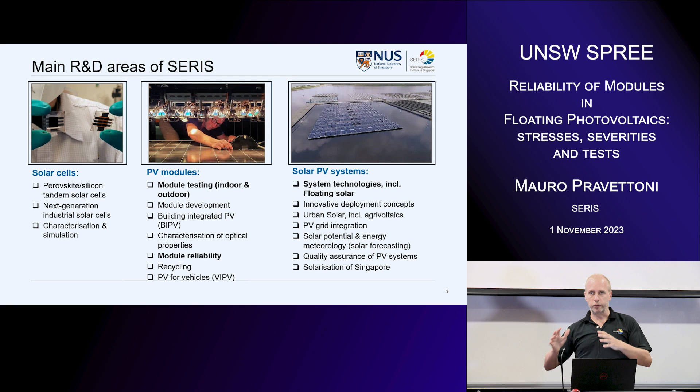So the main R&D areas of the institute cover solar cells, solar modules, and solar systems. There's a picture there showing me measuring an incident angle modifier at module level. That's one topic that we discussed this week quite intensively. The slide here lists a little bit of our topics. Let me see if I can go there with this. Yeah, there we are. I highlighted here in bold the topics covered in this presentation: module testing, module reliability, and floating, which covers both the system and the module level. But here I'm focused on the module only.

Floating PV is one of the 3 flagship projects of SERIS, together with perovskite, more specifically perovskite on silicon tandem structures, which is the flagship project of the cell cluster, and building integrated PV, which is our own flagship project, although today I'm not talking about BIPV at all. And of course floating, which has been pioneered together with other institutions worldwide, but with an important effort by my institute in the last years.

Now here I want to show a little bit about my laboratory, for those of you who have never been there. We are located in an off-campus site from NUS in Singapore, and at level 6, this is what you find there.

I try to use a color scheme. There are some climatic chambers of various sizes. As you know now, the modules are gigantic, so we need to have big chambers for them. Then we have the blue boxes that are all related to irradiance tests, so solar simulators, both for high accuracy measurement, but also for light soaking, and UV testers.

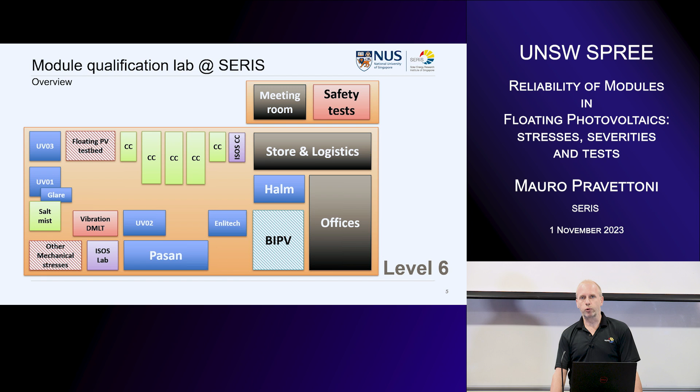But probably what is more important to highlight here is the mechanical part, including the project for a floating PV testbed, for which I will say something at the end. Now, if you go out from the laboratory and you go down to level 1, you enter and you will find very soon our recycling lab.

So basically, this is a project for which we aim at achieving circularity. Modules and cells, in fact, come into the institute, come into our laboratory. We can make modules with the BIPV group. Then we test modules with stress tests. Eventually, we may destroy modules, and we want to recycle them. So here are some pictures of the machine we are going to install early next year at level 1 in our institute.

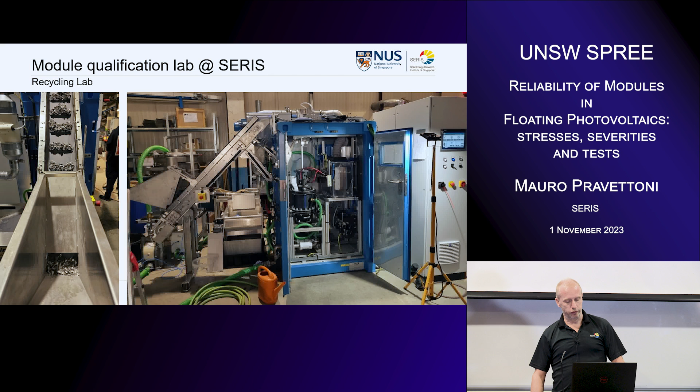On the other side, if you go on the roof, then you enter our outdoor test bed, which, as all test beds, has a light-induced degradation research area, a PID research area, which is very specific for our climate, and other reliability tests in progress.

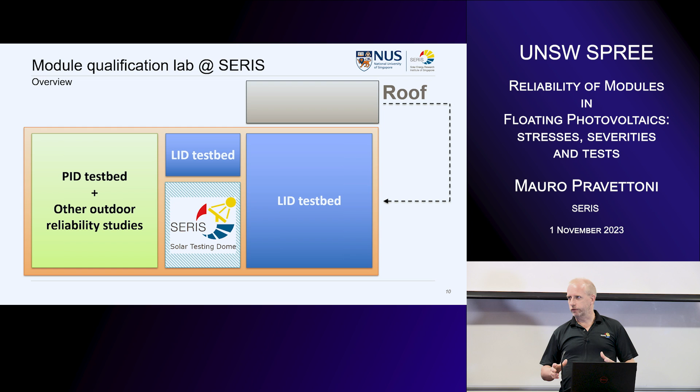Plus, what we are planning, and is mentioned there at the center as SERIS testing, what is it? Well, it may look like this one more or less. So the idea is to have at the same location a BIPV test bed with plug and play BIPV tests, and also a dome that opens when we want to measure in given conditions. That's it for introducing you to SERIS.

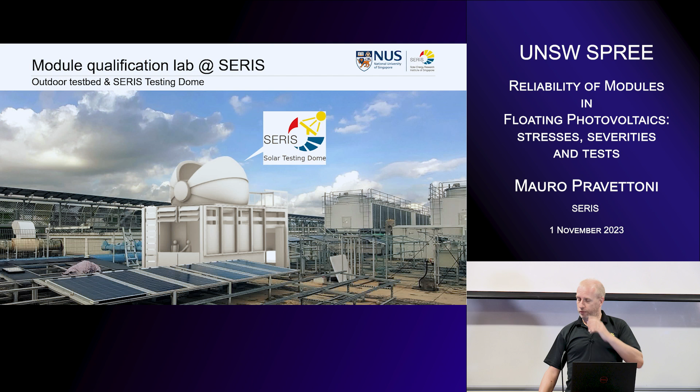And now from the next slide onwards, I will enter the topic of today, which is reliability for floating PV. So the starting point here is what I call conventional PV, which I want to differentiate from what is going to be new in non-conventional PV. Now I'm talking to scholars, students, and experts, for whom maybe this distinction is a little bit more gray now, because we all deal with new things, and new things are probably not really conventional.

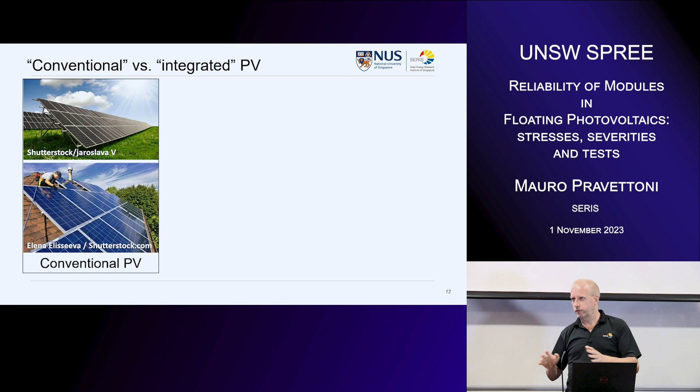But for the sake of simplicity, I really divided here what I consider conventional, which means if you put a module on the roof or in the field, well, that's well known, right? It is also new, always new, but at least it's conventional. I call it conventional. And what you put elsewhere, I call new integrated PV solutions.

In fact, my institute, together with other institutes, including Jülich, I believe, and other Chinese representatives, launched 2 years ago a new workshop. New workshops are always welcome, right? An integrated PV workshop. So here we want to group really everything that goes on cars, on floating, on urban infrastructures, on buildings, because we believe that there are even more new things to address, including specifically what I'm saying today, reliability aspects.

So here I group 3 of them, but there are several, of course, and the fantasy of our field and our manufacturers is never ending. So there will definitely be more in the future. Anyway, here we are talking about floating.

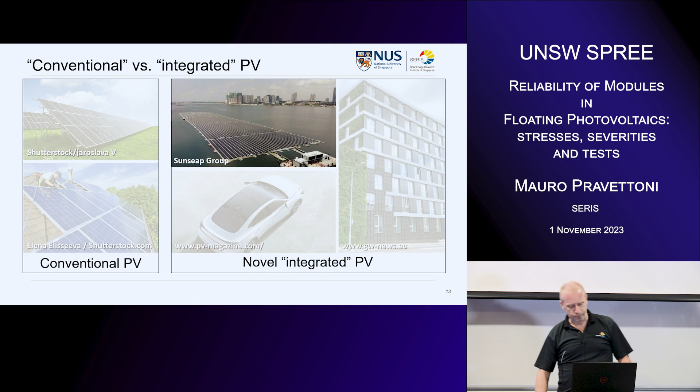Now, the market perspective in floating is clearly growing. The interest is there, and every one of us can see it. It is a little bit regional, still biased. It's not equal everywhere, right? But somehow all countries are looking with some interest at floating PV for various reasons. Here we see the floating solar installations in gigawatt DC foreseen up to 2026, to 4 gigawatt or so. This is an estimation provided by

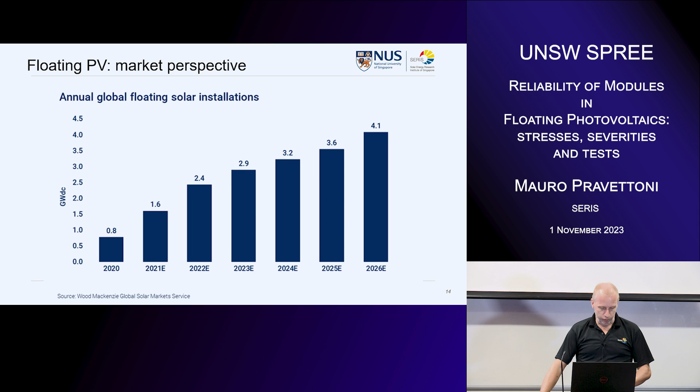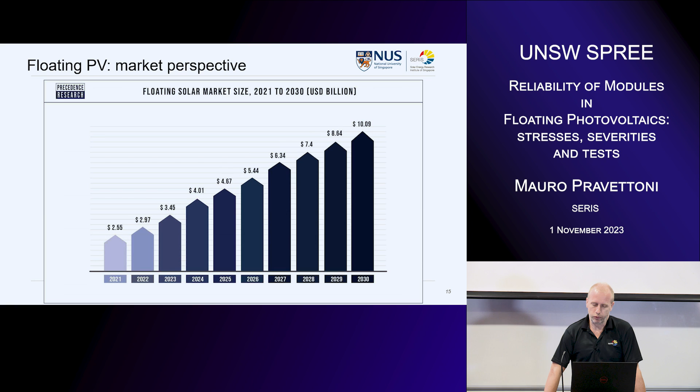Wood Mac. Another agency shows here the floating solar market size. Again, linearly growing. We don't know, but in the PV world, we often see something that starts linear and becomes exponential very soon. So it may continue linearly, it may stop, but there's also a chance that it can grow even further than these numbers.

Now, as I said, at the moment it is still very, very geographically biased. It's mostly an Asian game at the moment, as you see in the color schemes here. We are where we are now. Well, this is a little bit outdated, right? I'm not sure if this estimation has been confirmed, but I think pretty much it is. So as you see, this is in percent, of course, so relatively speaking.

China is dominating the installations and the market size, but with important competition from India and South Korea. We all know this because, apart from me, who comes from Singapore, although with a European background, these are the countries that are more active at the moment in our pre-normative activity.

See the all others, which is always an area that is growing. So there are other countries. I think it's worthy of mentioning the Netherlands for Europe, which is by far the biggest one at the moment, and yeah, other countries most likely will follow.

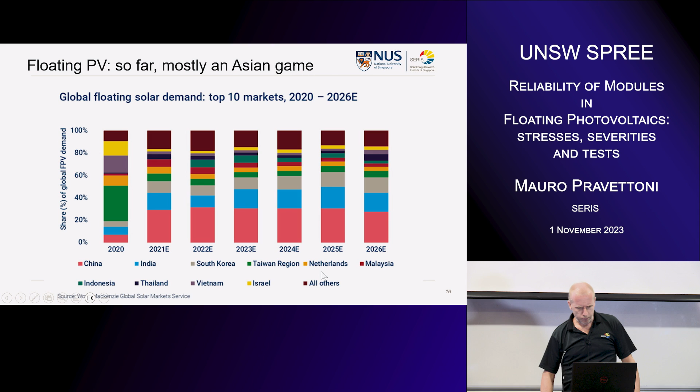So here again are the countries that will cross 500 megawatt of cumulative floating PV power installations by 2031. Again, China, India, Indonesia, South Korea, Vietnam, Thailand, and downwards towards more other European countries. Worthy of mentioning USA, if not just for something that I told many people these days,

episode, right? So I started presenting some ideas that came out in this presentation today back in last February at the annual reliability workshop. And to my surprise, I think it was talking with George, but anyway, to my surprise, there was little on floating. And coming from Singapore, where everybody talks about floating, I was a little bit surprised.

So I asked some colleagues from NREL why, and they said, Mauro, we have plenty of land, right? Why should we put solar on floaters? Same argument may apply here. So most Australian friends here may have the same perspective. Why should we put on floating? We have plenty of availability of land. And then I was a little bit touched, saying, I'm stupid. Of course, that's true, right? I mean, Singapore has a problem with land, we'll see next slide, but definitely not all countries have this problem.

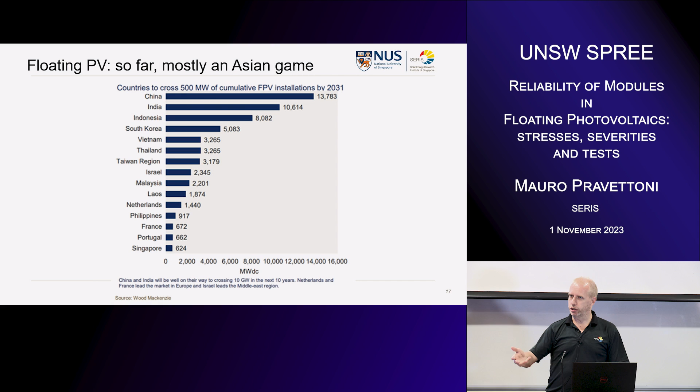So then on a following night when we were having a beer all together, I was thinking, but come on, China? China's not small, right? There's plenty of land there too, so why are the Chinese pushing so much on floating? And then I asked a Chinese colleague, and he told me, you know what? There is this nexus between floating and fish farming that the government is very interested in, also to push a little bit the economy of fishermen, right? If I say it like that. But anyway, there's this nexus which is of a lot of interest. So it means that it can be of interest also in other countries that follow the same reasons.

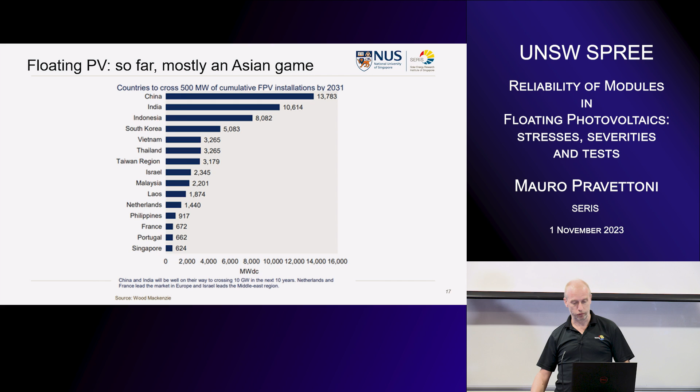And the population is I think the third or the fourth in the world in terms of density, and that's probably the driving reason, right? So we are highly densely populated, and we need energy, and we don't know where to put solar energy. I mean, we have somehow depleted all the possible options, and floating is the next one. But of course, floating comes with troubles, right?

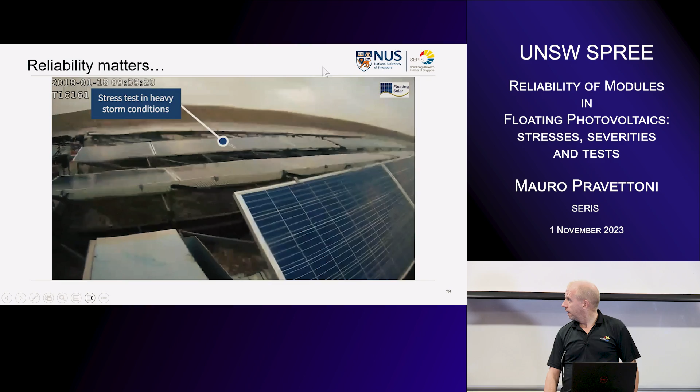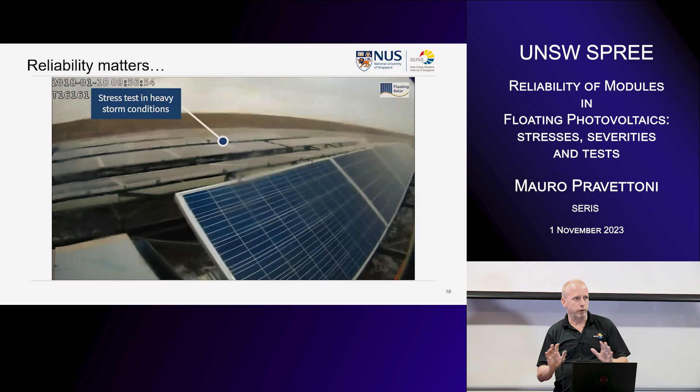So the topic of my presentation is somehow shown here. Out of the impact of images, well, you don't necessarily have to put solar modules everywhere, right? You may avoid certain areas, but we know, back to the idea of conventional versus non-conventional PV, you can't have steady water, right? There will be waves. There will be some movement, which for us reliability experts in the room means there will be troubles there.

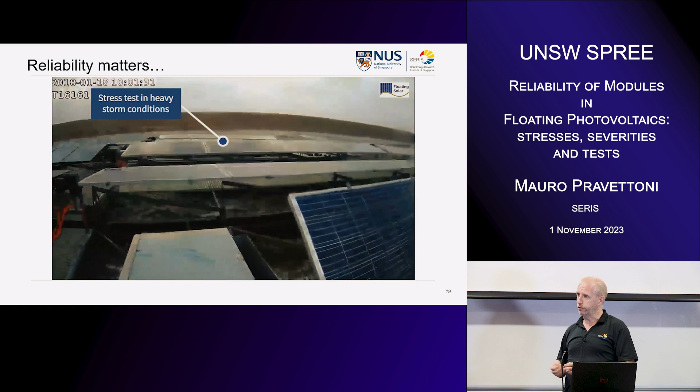Anyway, there is something we need to assess further. Not only that, another problem is of course safety, and here there's a nice journal press release by Emiliano, and it shows something that happened this year, right? So basically, a floating plant somehow landed in Hong Kong, and there are many problems, including that nobody knows where this comes from.

So someone should pay for the damage caused, right? It's funny somehow for those who are not the owners of the plant, of course, or the island, but we have to address something and be sure that these problems do not become more serious than they are.

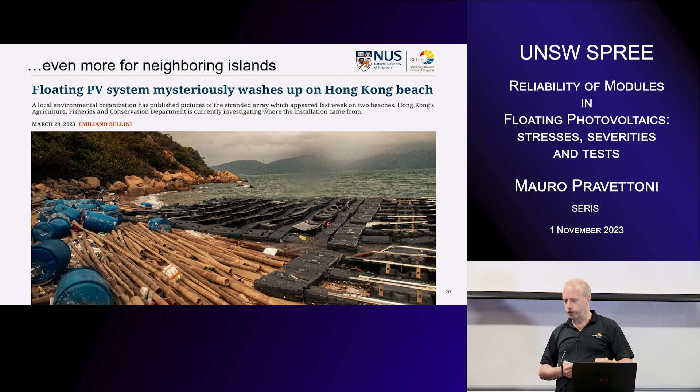So I mentioned previously already that the story of SERIS with floating is not new. We started already some 5 plus years ago, right? Even more than that, let's say almost 10 years ago now, proposing floating PV as a solution for Singapore, and started liaising with stakeholders in the region and beyond the Southeast Asia region.

And the biggest highlight of this research activity has been these 2 publications with the World Bank, which you can download from our website. You just Google this, where sun meets the water, and you can download this for free. The findings described here later came into a national standard technical report, actually, that is now supposed to be promoted as an international technical report at the system level to describe lessons learned and best practices, these kind of things.

Okay, here I just reviewed the most recent activity from 2021 to 2023, specifically the research collaboration we are having with a Norwegian firm called Fred Olsen Renewables, who are part of the people that I need to acknowledge for this work. Starting in 2021 with technology mapping and financial modeling, ending this year, still ongoing in fact, with a collaboration with DNV towards studying the problems at the module level. So again, the reliability, which is what I'm discussing today.

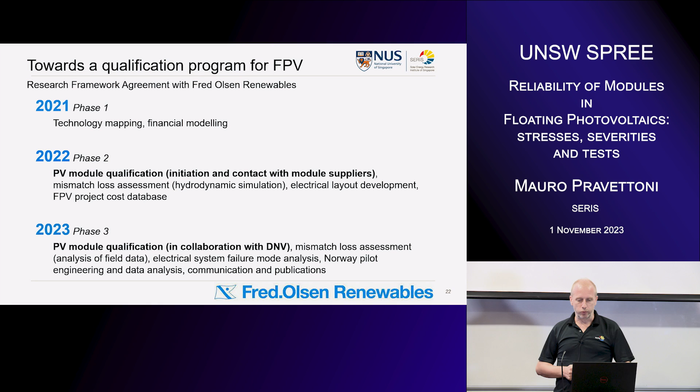As a result of this collaboration, we have identified slightly more than 100 possible new causes of failure, and we have compiled this risk matrix. So you see on the horizontal scale there is the probability class, so how likely something can happen in the lifetime. We rate from 1 to 3: 1 when it's unlikely and 3 when it's very likely. And on the vertical scale there's a severity class: 1 when we consider the severity minor, and 3 when we think the severity is high, meaning that you need to replace the module or components.

Of course, once you multiply the 2 in a matrix, you have something that goes from 1 to 9. 1 you may accept. 9 you definitely need to do something to prevent it, or take into account that this will more likely happen. Now I give you examples of failures that enter here. There will be raising hands here from my colleague from WG2, I believe. But anyway, I take the risk.

What we consider mild in the particular environment of floating is the soiling due to snow and formation of ice. Mild because maybe you don't want to put modules at all in these very high latitude regions, or because this may not be more problematic than what already happens on the roof. That's why it's considered in the green area of this risk matrix.

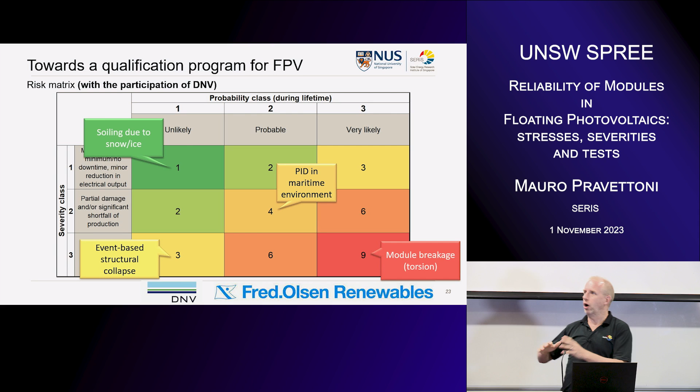We judge this as kind of probable and partial damage, depending on how severe the PID effect would be. So in order to better understand what I'm going to classify as new environmental conditions and possible stresses, here we have classified floating systems based on two bigger distinctions.

One is: is the module going to be in contact with water, yes or no? On the left, you have the case where the module is physically separated from water. On the right, the modules that are not physically separated from water. Now in the two cases, we divide again in two. The physical separation can be because the module is far from the water, still in a floating environment, but too far to be touched by water in any condition, or because there's a medium that acts as a physical separation, so water cannot touch the module.

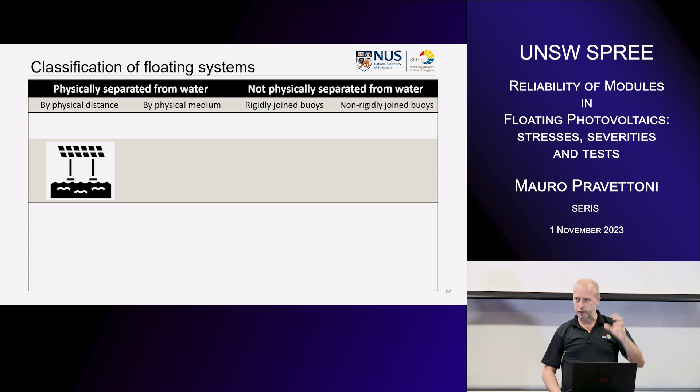And when there is a chance of contact with water, we differentiate which kind of floating system we're talking about: if it's a rigid floating system, so the module can move with the system but cannot move between each other, or when the buoys are non-rigidly joined, so the module can move with more freedom. This is an example in the sketch of physical separation -- this is a membrane, this is a unique block of floater that moves the whole system up and down, and this is a case where there is no rigid buoy.

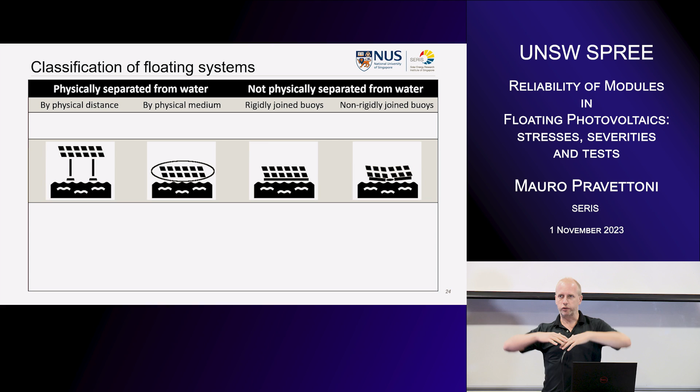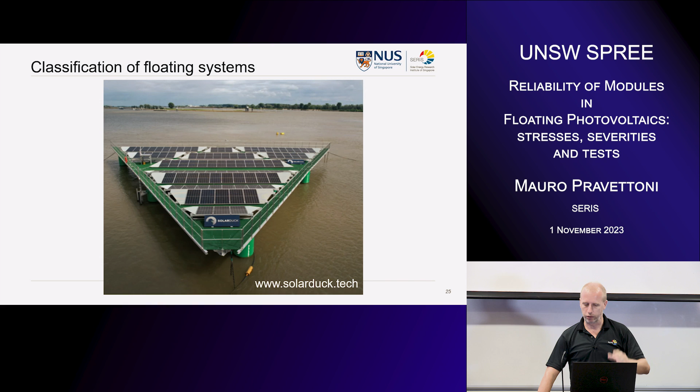This is just my own drawing, so let's see some real pictures. SolarDuck proposes this big system, which is floating, and I guess none of you doubt that it can rain, but a splash of a wave in this particular case is very unlikely, if possible at all. Now, Insane Energy -- that's always my way of pronouncing this Norwegian manufacturer, which is actually In Sea Energy -- this is the example of a membrane.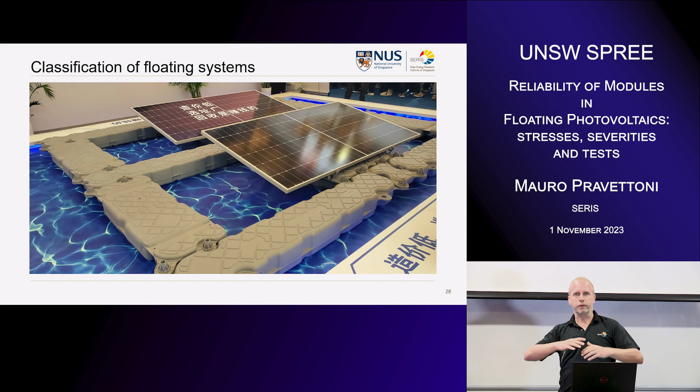And you can see why I think here there's more possible movement of modules. The difference between these systems is a difference in complexity, and that brings a difference in risk. We believe that low complexity goes towards high complexity from an engineering perspective, while the risk goes in the opposite direction. The question for the developer or owner is what they want: spend more and have less risk, or spend less and have more risk.

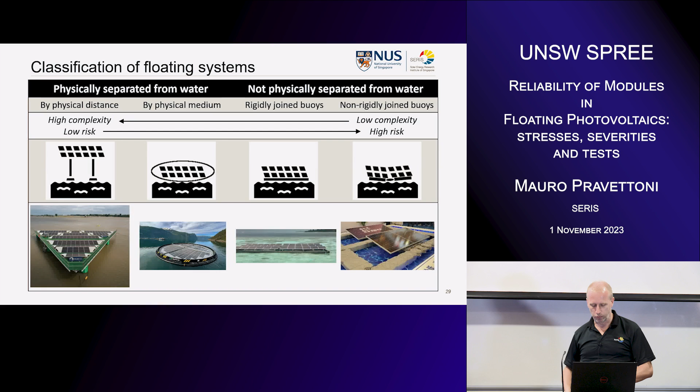So now we enter the topic, having this in mind -- we move closer to the topic of module reliability. The way we approached this was to look at the standards, what is there. I mean, step a little bit out of what we're used to doing at the module level, and look at what is outside the module level.

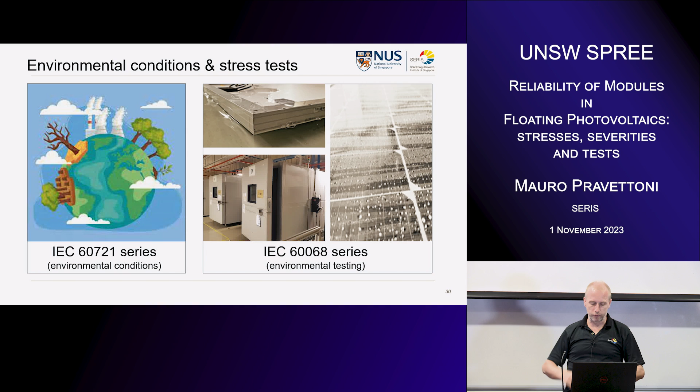Fortunately, there are two series of standards already: 60721, which lists the environmental conditions, and 60068, which lists the environmental testing. These two series of standards are correlated -- certain tests apply to certain environments. What we're used to, and probably most obvious for my talk, is the 61215 series of standards, which is module qualification. In a very simplistic form, a module that is commercialized and certified by certification bodies has to pass this test as a bare minimum, plus something else. This test tells you that if the module is put in its environment, if it passes this test, we are quite sure it will survive day one.

It doesn't say it will survive 25 years. It says that it doesn't die the day after. Then there are other tests that can give you more confidence that the module will last for longer.

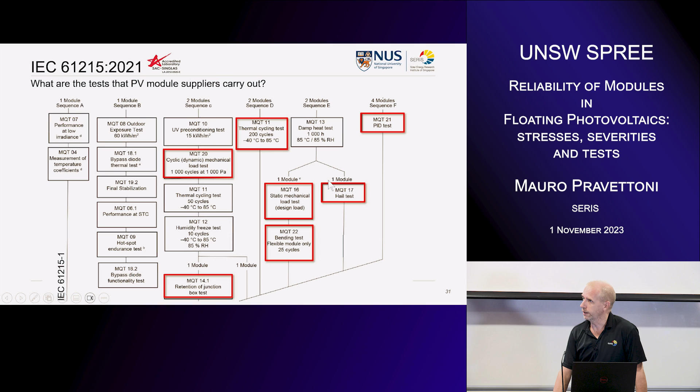Here I highlighted specifically certain tests that I think should be revisited. I'm not saying that modules that go to the sea don't have to pass these tests, but other than this, they should do something else, because the environment is different than the environment for which this scheme has been designed. And if you see, there are mostly mechanical tests that we think have argument to say that it's probably too mild for the situation, the environmental conditions in floating.

Now, moving to the new environment, here basically in this set of tables, which I will not describe all in detail because it will take too long, but at least we show a little bit. So we are listing the environmental conditions as they are classified in the 60721 standard, and the description of the possible severities that you find in maritime environment, taking specifically that environment, and possible tests that we may want to introduce. Some of these are already there, some are not.

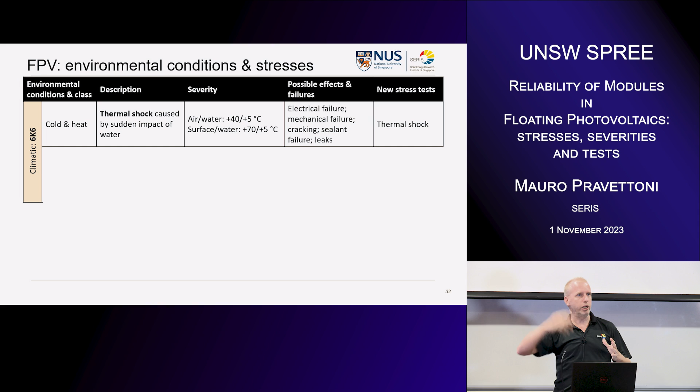Here I'll stop for a few seconds on the first one, they call it climatic environment. So that means anything that depends on the climate and deals with the variation of temperature, and on heat. A new stress test that I highlight here is the thermal shock. During our meetings this week, there's been some discussion about what that means, is it different from thermal cycling, which is a standard test we are already doing.

Here I'm thinking about the thermal shock on your module, which is under the sun, in the middle of the sea or of the lake, at noon, for which the module is probably at 60 degrees or so, and then some wave comes through, splashes your module, and the water is not at 60 degrees. The water is not even at ambient temperature. It's clearly probably at 4, I mean, it depends on the season.

And on the location, but it can be 4 degrees. In the most extreme severity that I found, the possible variation air to water, as you see there, is 40 degrees to 5. This is considered an extreme variation: air at 40 degrees and water at 5. But of course, the surface is hotter than 40 degrees, so the surface of the module may be 70, and here it's on us to decide whether 70 is representative, or you may have higher, because the module may have other reasons to be hotter than this, but whatever. And 5, again, is the temperature of water. So here the temperature of the module will move very rapidly from 70 degrees to 5. Are we stressing the modules this way? Well, the answer is clearly no. So we should consider whether it's possible to implement a new test to stress the module this way.

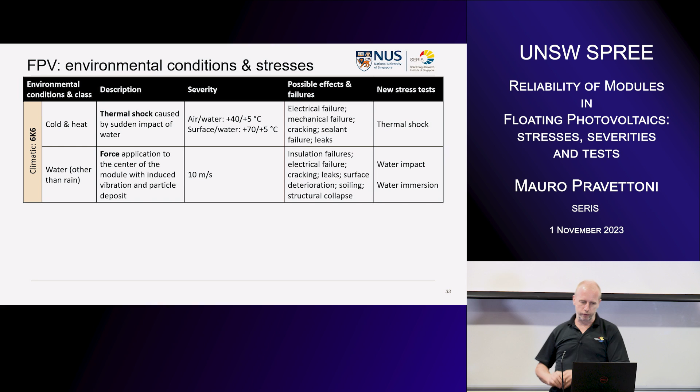Now, for the other stress tests and climatic conditions, we'll go a little bit faster in the interest of time, but trying to mention them. So, the impact of water other than rain. Modules are supposed to withstand rain, not only rain, hail, snow, this kind of environment, but on top of that, here we're talking about waves that can splash on the bottom or on the top of the module. And this is something that the normal module is not supposed to withstand. Here the severity is considered 10 meters per second in terms of speed of water.

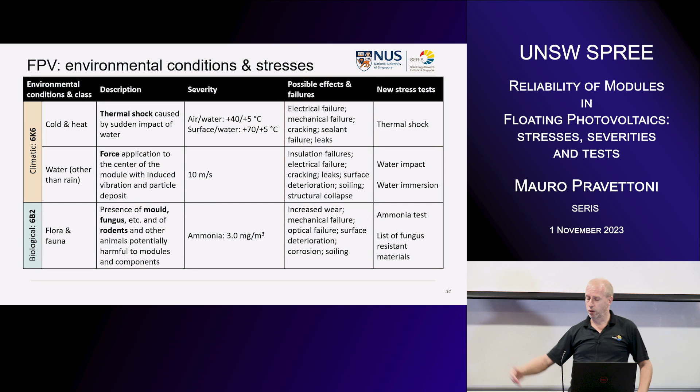Now we enter another classification, which is that of biological environment. So, some stress caused by, for example, mold or fungus or rodents or these kinds of things. We already have the ammonia test, which is not a qualification test. So a module to be put on the market doesn't necessarily have to pass the ammonia test, although it's already somehow a popular test to be done. It may become, let's say, a requirement if we go forward with qualification requirements for modules that go on the sea. And something else that, of course, at the material level, we are already trying to find. Here I put some symbol on what we think is critical.

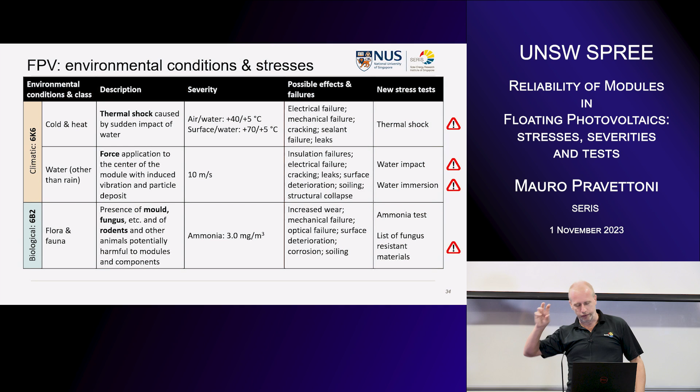Moving forward to other environmental conditions, not necessarily climatic: chemical substances, similar to biological substances, but talking about chemical reactions and corrosion. The salt, if we're floating in the maritime environment, in the sea, is definitely a concern. And whether we want to consider a combination of PID with a salt mist environment is something to be discussed.

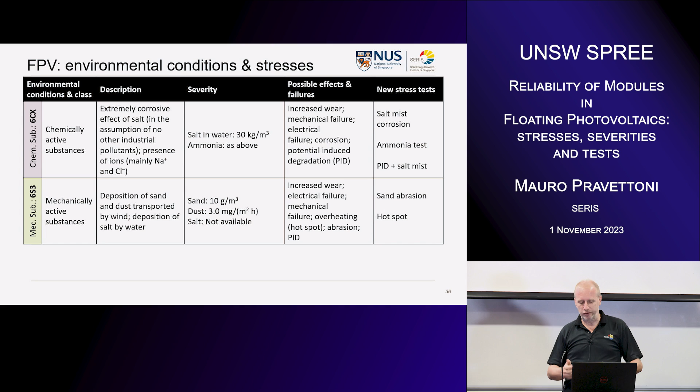Other than chemically active substances, there are mechanically active substances. So sand or salt itself can act mechanically on the surface of the material. Also, this morning in our IEC meeting, there was discussion about how the effect of abrasion can affect the quality of the module. So this may also be considered at the material or module level to be introduced.

And finally, the mechanical stresses. Here I listed 3 different lines. One is the stress due to stationary vibration. What I had in mind is the motion, mostly the motion due to the sea, the waves, or the waves in lakes. Other kinds of vibration can be caused by shock of water, and then the module starts vibrating.

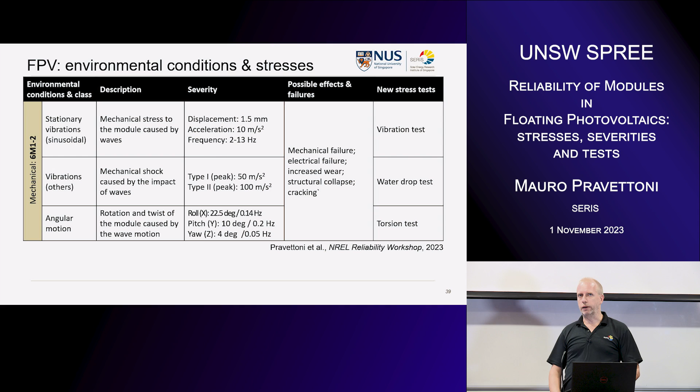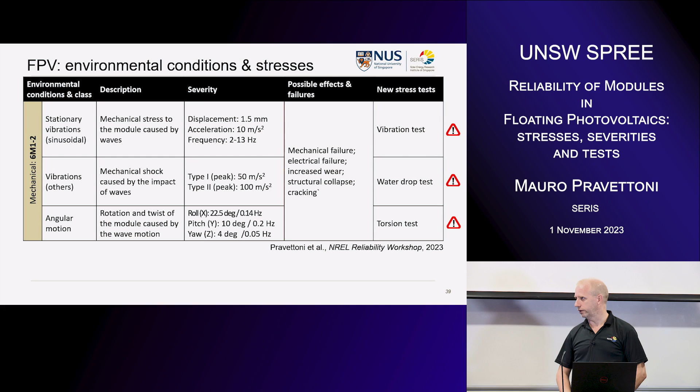Finally, the angular motion, which we distinguish from vibration. We need to understand better what the 60721 standard means. Most likely it's really the movement which in English is roll, pitch and yaw - all the movement of the boat, which now becomes a movement of the module that you need to take into consideration, because it can cause torsion, which is critical. All of these, I think, are critical, as you will see in this last part of my presentation that I'm entering now.

Here I'm showing some results, examples from a set of tests that we have performed in the last 6 months or so at SERIS. I want to distinguish 2 big tests: one is PID with salt mist, and one that justifies what I said previously, that certain modules that suffer mild PID in standard condition see an accelerating effect if you do PID in salt mist conditions.

I'm mentioning here some names where I know, but you will not see which module did what - this is for confidentiality. So we normally don't disclose that this module failed, this module passed. It's not fair. But just to show that we don't take unknown modules that you have never heard of.

These are commercial modules. Just one clarification: the modules doing salt mist were small for one reason - at that time we did this test, our salt mist chamber was still an old one, could not fit the big modules. Now we have a bigger one, and we can repeat these tests on large scale modules like the one we have used to do mechanical stress tests.

I want to highlight one thing. For PID, one very old module, PID was unknown at the time, so there's no indication in the old technical data sheet whether this module is PID free according to the manufacturer. Then we have one module by Trina that is clearly stated anti-PID, and another module which is considered PID resistant. Of course this is different wording - it may have different meaning, or may just be synonyms depending on how the commercial body of these manufacturers wants to treat the PID free quality of their module.

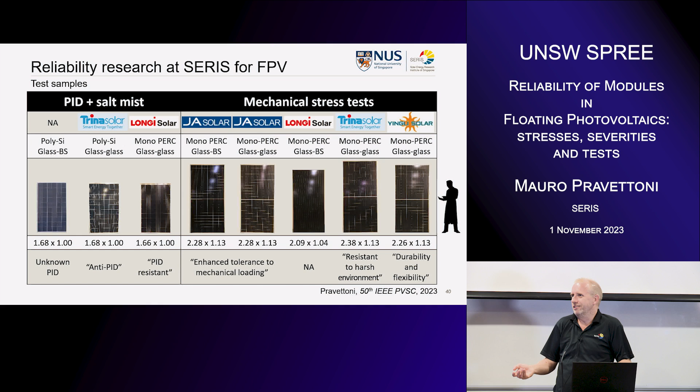And none of these have this classification. We need to be fair with these manufacturers because some of these you will see fail. I will not say which of them failed torsion, but whichever it was, they would surely say, Mauro, I didn't say that this module is resistant to torsion. Do you want a resistant to torsion module? I will make one for you.

Okay, anyway, start with PID in salt mist. This is the one which now I call PID prone, but at that time it wasn't revealed; PID was unknown. It's a very old module. And incidentally, this module suffered PID. So on this particular module, which was known to suffer PID, you see the difference between the module that suffered PID in standard environments, a standard PID test.

To be honest, this is not exactly a standard PID test. This is the old standard, 60 degrees Celsius instead of 85. And it lost nearly 5% in standard conditions; with salt mist it lost nearly double. The control module is the same module technology, and did not enter the chamber, right?

And here you see what happens due to PID. This is a module that suffered PID, and this is a module that suffered more severe PID in salt mist conditions. Now, this is the PID-free module. It is indeed PID-free.

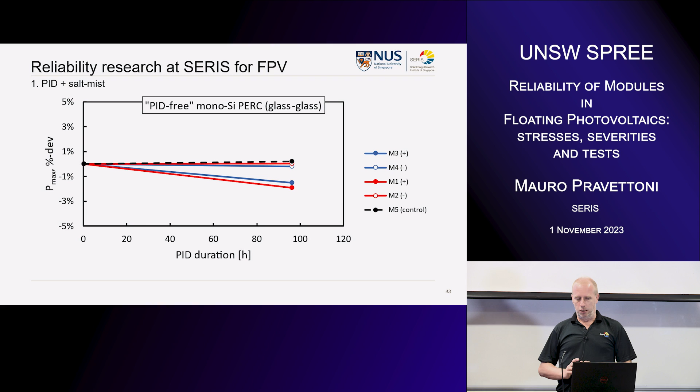We can only highlight that in one case, negative polarity, there was slightly higher degradation. But to be honest, at this level, we can't really distinguish. It may be the reproducibility of the measurement. And here, we can say there's a little bit more evidence of PID, but again, not much difference between PID in salt mist and PID in normal environment. Remember, this module is considered PID resistant. So, in fact, it is PID resistant.

Those of us that are in the reliability and standardization committee know that normally 5% is the threshold, right? So if it fails, it means that it loses more than 5%. But clearly, if it loses 1%, you're not happy. But in principle, it's a pass. And here you see the two examples of the two cases which lost more, and the evidence of mild PID occurring in these grayer cells, right?

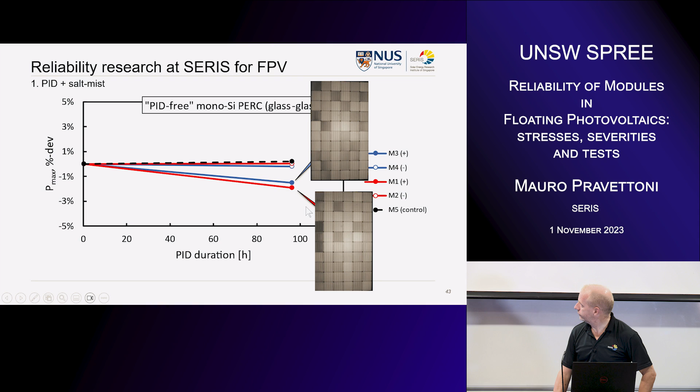Now, moving to the last of the set of measurements we have done, the one on mechanical stresses. Our benchmark was the dynamic mechanical load, because this is already a standard test. So the approach of the team was, okay, let us see if the module passes dynamic mechanical load, does it pass torsion or vibration? So basically, we are comparing these three tests.

Standard dynamic mechanical load, here you see the specs for those of you who are not familiar: 1,000 cycles, plus or minus 1,000 Pascal, and the pressure is exerted at the center of the module, more or less for all manufacturers. So clamped in a way the manufacturer specifies, at the corners typically, and pressed at the center, right? And typically to see if it passes or fails, you do pre and post Pmax and EL to see if there are cracks.

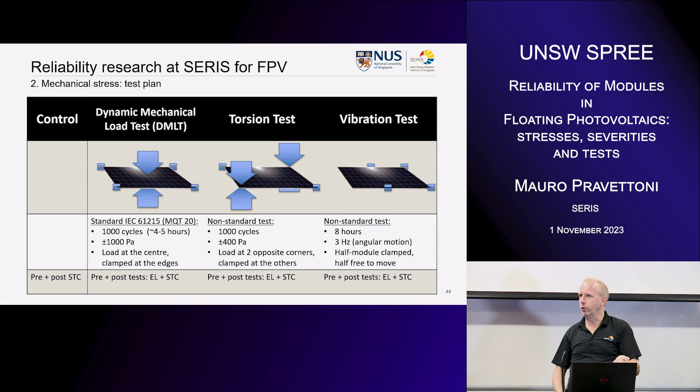The torsion we did the same, just changing the position of the pistons. You will see a movie shortly to see what I mean. So basically, we took up all the pistons, clamped the module at the corners, and started pushing up and down at the other corners to generate torsion with the system we have, without buying new equipment. And I believe this is very easy for those who have a mechanical load test bed. Everybody can do it, right? And then the question is how severe the stress. So we just used the same parameters of the dynamic mechanical load, just changing to torsion.

Sorry for my animation. I'm sure that describes perfectly what I'm doing. You will see in a movie anyway.

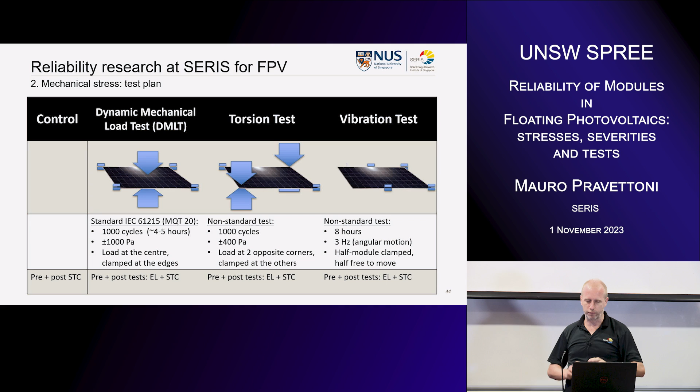So here we are clamping half of the module and letting the other half vibrate with the vibration table, as you will see. Difficult to replicate the same as the DMLT. So here we decided to keep more or less a similar duration, so 8 hours. And for the frequency, we looked at the previous table where 3 Hz was somehow the frequency of motion of waves and whatever. So we kept 3 Hz.

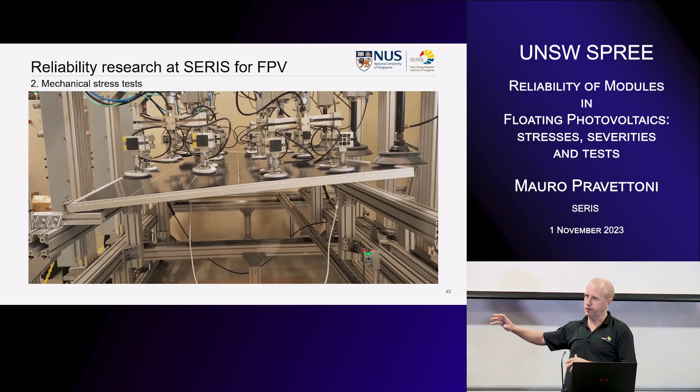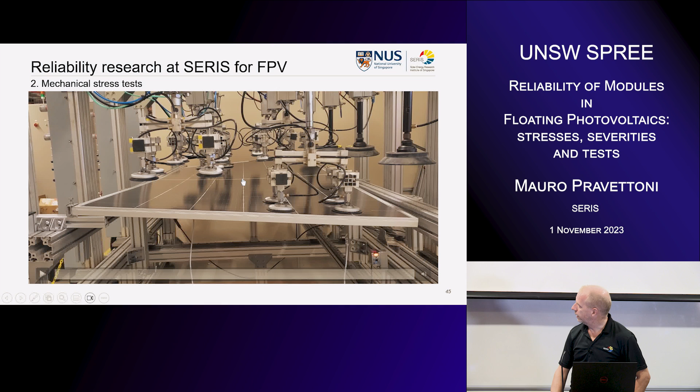Yeah. So here you see the experiment in torsion mode. Crick crick crick, maybe the frame, but usually it is not. But anyway, that's what happened. And as I told you, basically this piston and the opposite piston are going up and down. The other pistons are all released, and they don't exert any pressure.

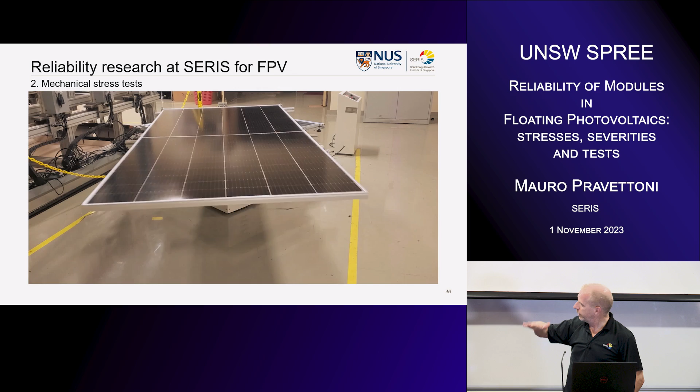And this is the vibration. So clamped at the center, we decided in this case to do mixed vibration. So not only longitudinal or lateral, it's mixed. Okay, on the vibration, actually I didn't specify previously on the table with the products: we deliberately took modules with frames.

But we also tested this one at the beginning just to see where we are, right? Test to fail, somehow. Let's see what happens. And stress it as much as we can to see when you see something, because otherwise there would be no result to show, right? So at the beginning we took what we thought were the most fragile conditions, so frameless. And with frameless, no way. Not 8 hours, not even 1 hour.

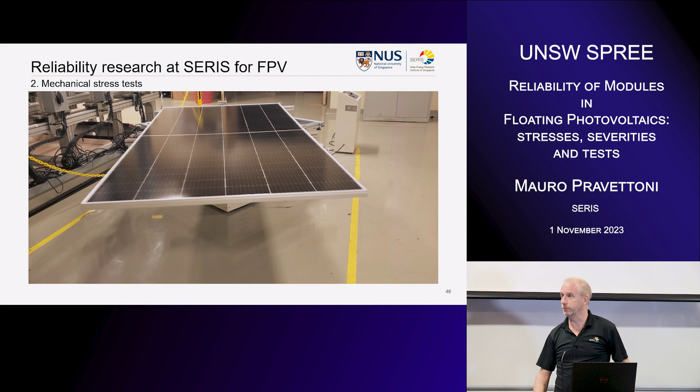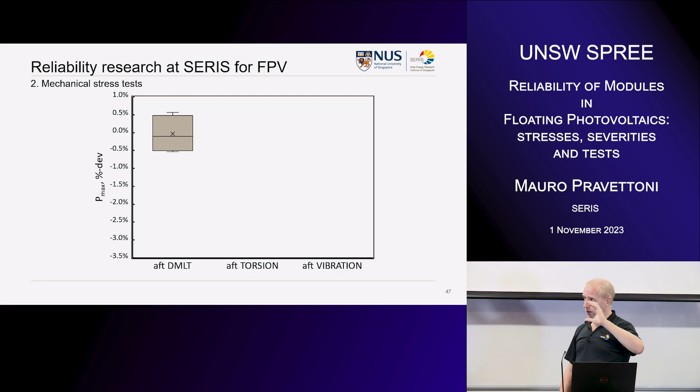Okay, so no frameless, only framed, because with no frame there's little to see. So we tested all framed modules, and here we have the results. So this is the benchmark: dynamic mechanical load. I actually forgot how many modules there were, but anyway, we tested one module per type, per different manufacturer, and we had one control, right? So it could be 5 or 6.

So you may want to do a measurement and repeat it now. You don't touch anything, the instrument is still there. You just wait until the machine is ready to repeat the measurement. That is, strictly speaking, repeatability, and you have the minimum tolerance in variability. Anything that varies within repeatability is just nature, the physics of the phenomenon you are studying is not repeatable. So if you repeat twice, for whatever reason, you have variation. But, for example, variation in temperature doesn't cause this.

Because, at the module level at least, in our world, it's unlikely that if you repeat the measurement twice you first do the measurement at 25 degrees and then at 30 degrees. Likely the ambient temperature would be very similar, right? So you take out most of the potential sources of deviation between 2 measurements, and it's just repeatability, so the closest possible results of 2 measurements.

Now, it's completely different if I do the measurement and then send it to my colleagues in another institute in the USA to repeat the measurement using the same procedure, but clearly different equipment, because it's a different country, a different institute and different people. That is called reproducibility. Of course, the measurement should be the same if we don't make errors, but the tolerance of the deviation we may expect is bigger.

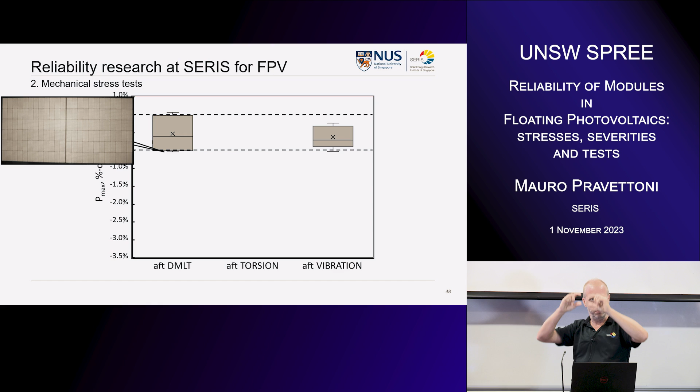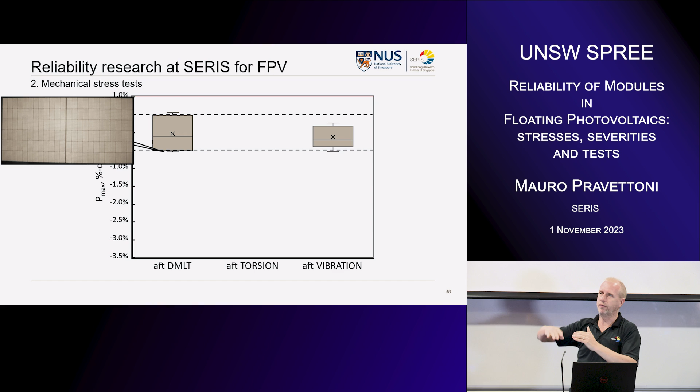Okay, what happens if you do vibration? Still, there's a spread. The spread now goes a little bit towards the bottom part of my intermediate precision, but it's still within intermediate precision. So again, you can't say too much, but there's a little bit of a change. There are more that lost something. If it's really intermediate precision, it's up and down. If it's random, some can gain, some can lose, but in fact nothing happened.

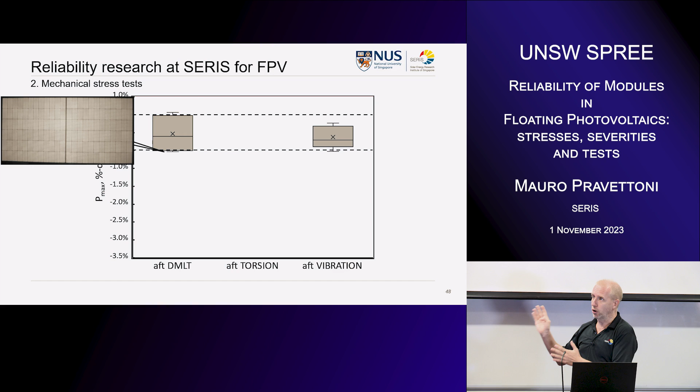Here, there are more that lost than gained, but again, not at a level at which I can say something. Although you see that the whisker falls below the intermediate precision. So let's look at that very module, and you see that module has something here. I can't say that this is really causing that power loss. It could be, but anyway, something happened to this module, specifically where you may have expected something to happen, right? Close to where the module is clamped.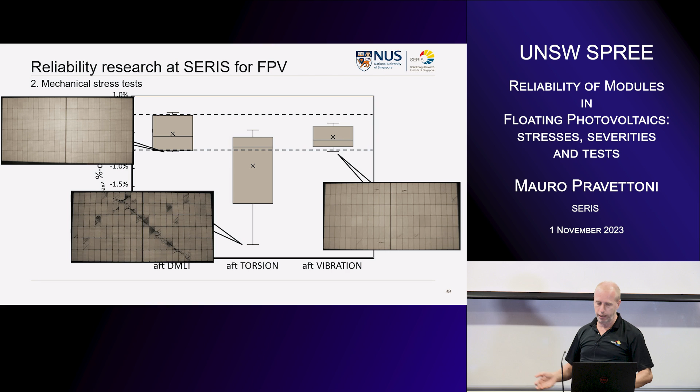This is torsion. Here we can say something happened. More than half of the modules clearly suffer some damage, right? Whether this is a pass or fail in our environment, we still have to decide, but clearly something happened, and obviously the EL confirmed that this is the worst case of the module. You see this line of stress where all the cells cracked and caused severe power degradation.

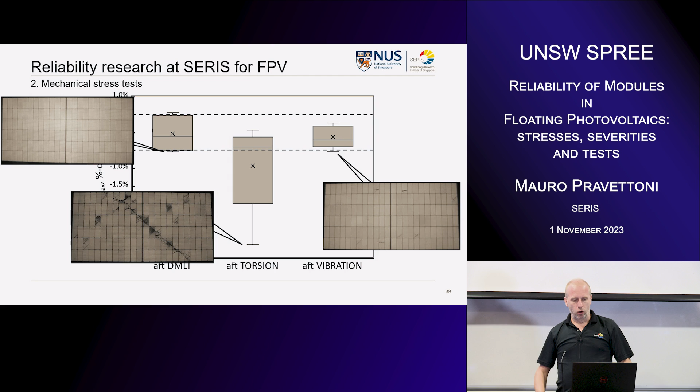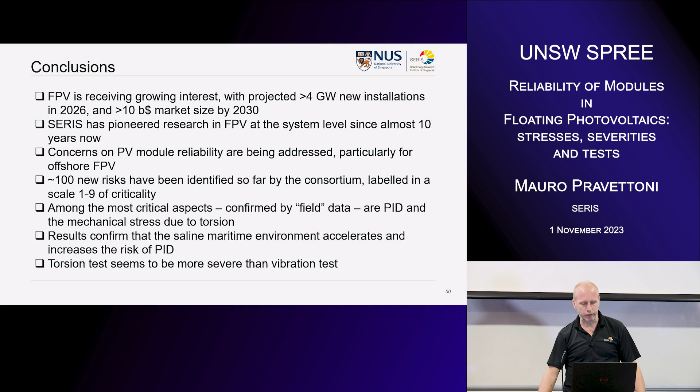Now, conclusions before a few slides on the future work. Floating PV is gaining interest, no doubt. SERIS has been a pioneer in floating PV research at the system level for already 10 years. Now, concerns about PV module reliability. Now it's becoming a serious matter; it's not only a funny idea. Reliability is becoming more important, so in our environment, IEC, we are talking about that. We identified a risk matrix, and we found some critical possible tests like PID or mechanical torsion.

What is the further work? In my laboratory, we are now trying to explore vibration in a cold environment down to 5 degrees Celsius, no more than that, because we can't put our vibration machine at minus something. But definitely this is something that can be done with other equipment. Explore propagation of cracks under vibration test. So maybe the vibration test passes, but what happens if after a vibration test you do damp heat, and then you measure it again, or something else.

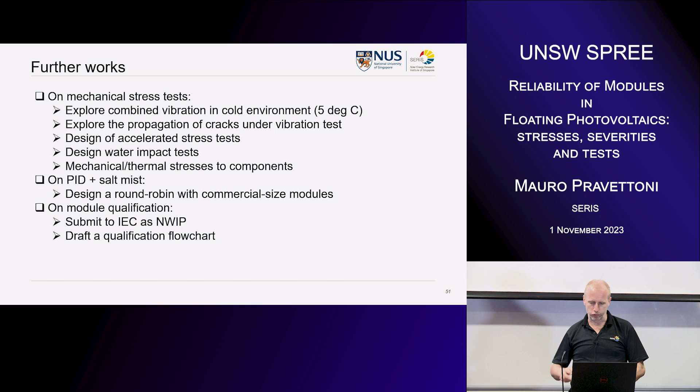Design accelerated stress tests, which is more complicated, of course. Water impact, and analyze or propose mechanical or thermal stress for components. Here I propose a round robin on PID plus salt mist, but we will see about that. Most importantly, because this has been discussed this week, is to work at IEC to propose a new work item proposal, and to start having an international agreement on what to do with modules that go to the sea.

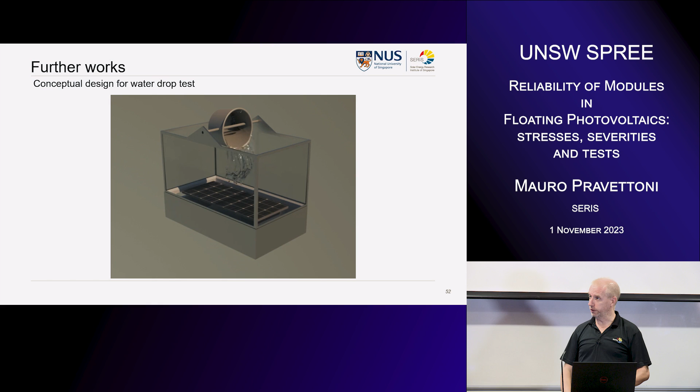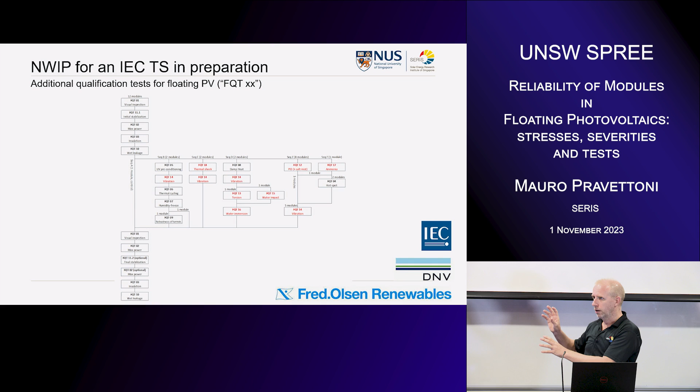Here is an example of the project that I thought of with one of my students on how to splash water on a module in a laboratory environment, and this is what has been presented at IEC level this week. So we designed a possible draft of new sequences for qualification of modules for floating PV. All that is written in red is new, right? But this is clearly inspired by 61215, the chart that you saw at the beginning.

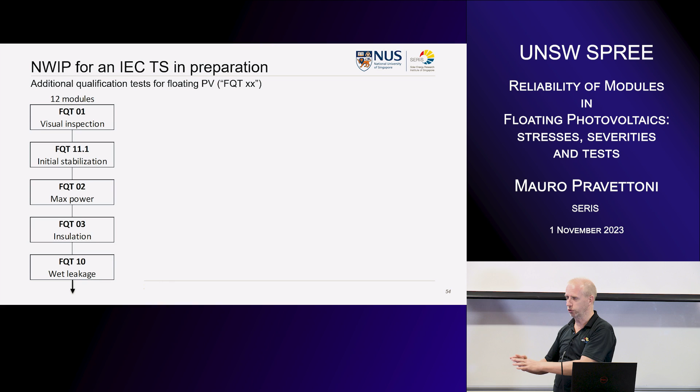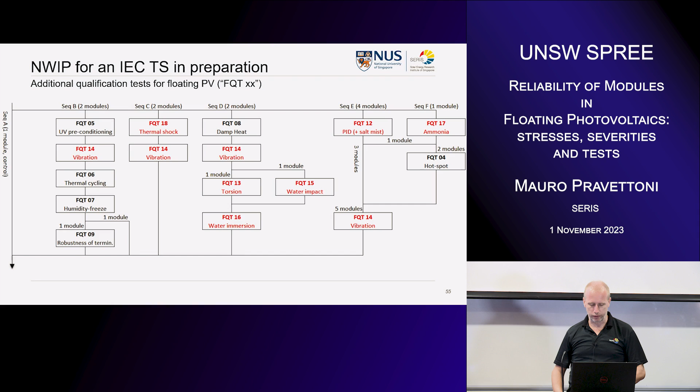There's an initial stabilization process, nothing really new. You want to be sure that when you start, modules are stable. When you start the process of stress tests, you have all the stresses, and again, the red tests here, which I label as FQT, different from MQT, which is the label of the qualification standard, are considered not alternative, but an add-on to this set of tests. The idea is to see what is already done for qualification, change what we think should be different, and see if it passes this test as well. And finally, a list of tests to compare the initial and final measurements and see if the module has degraded or not.

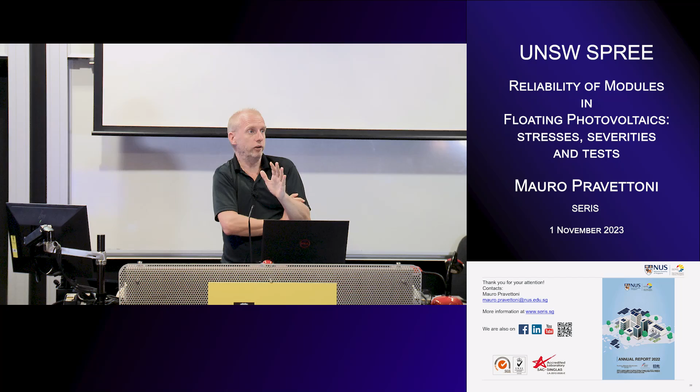And as I mentioned, when I stressed modules, that doesn't say this is allowed to be put in salt mist or floating offshore. At the moment there isn't, at least for the modules I stressed, but I notice already something happening. So there are already some manufacturers that have in their portfolio modules that I think are robust enough to go at least in reservoirs.

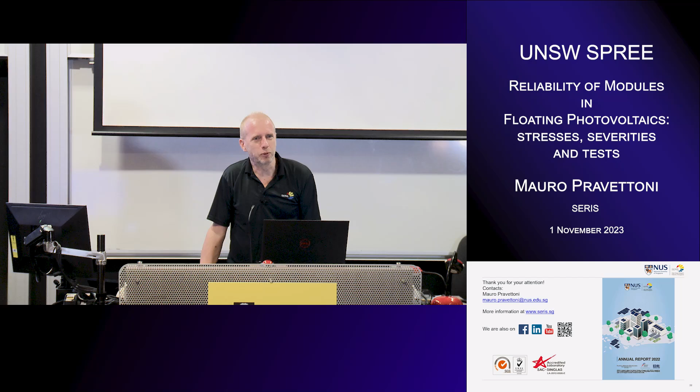Okay, it's about the operation question. I know SERIS installed such a wonderful test bed on your seashore side, and I also had experience in Korea with the test bed in the Saemangeum area, where the big issue was soiling from seagulls and seabird droppings. How do you manage it in Singapore?

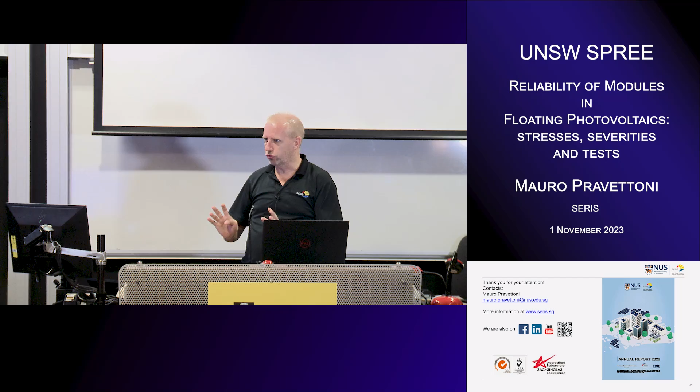At the moment, we are observing. That test bed you mentioned has been, I believe, one of the first designed specifically to get data and information, and we are still learning from it. In my list, the biological environment refers specifically to bird droppings and whichever problems come from the fauna and flora, which is different than on a roof. There's been some discussion this week about looking at the material level to see if anything can be done with resistant materials. But at the moment, honestly, since your question was specific to SERIS, we are not doing specific tests on this. We are mostly observing, trying to get data, and in collaboration with IEC, trying to design the most relevant tests for that.

Welcome. Yeah, there was one. Thank you for the interesting talk. I have one question regarding the salt mist testing. What kind of salt do you use for testing?

Sodium chloride. So as the float solar that's put in the sea, the seawater would have different salts besides just sodium chloride. Have you ever considered that? There's a salt mist standard we are using, and we are just adapting to it, but there will be research on this, right?

I can confirm what you say, because we have installations with recently analyzed modules coming from after 10 years in the maritime environment in Singapore, and you can find all different materials that come from the salt, not only sodium chloride. Again, it's an open question, to be honest. One thing is the corrosion, looking at the corrosion, and the other thing is looking at the deposition and the potential causes of hotspots from this deposition. PID has been discussed previously, so whatever can be aggravated by the presence of salt is under study.